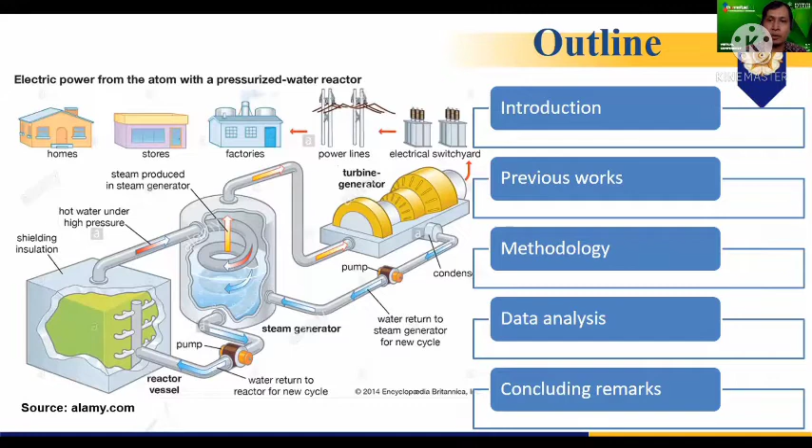So as an introduction, let us consider an accidental scenario in the primary circuit of a pressurized water reactor or PWR, namely loss of coolant accident or LOCA. As a result of a small break in the reactor primary circuit, there will be a sudden pressure drop causing a phase change and resulting in a countercurrent flow along the hot leg, a part in the primary circuit which contains a horizontal part, an elbow, and also an inclined part, namely the riser.

Once the steam flow rate increases, a limit of the countercurrent flow might be reached. It is called countercurrent flow limitation or CCFL. The CCFL initiates a flooding regime in which the partial or total fluid flows co-currently with the gas along the hot leg. This phenomenon, of course, is a disadvantage for the emergency cooling process.

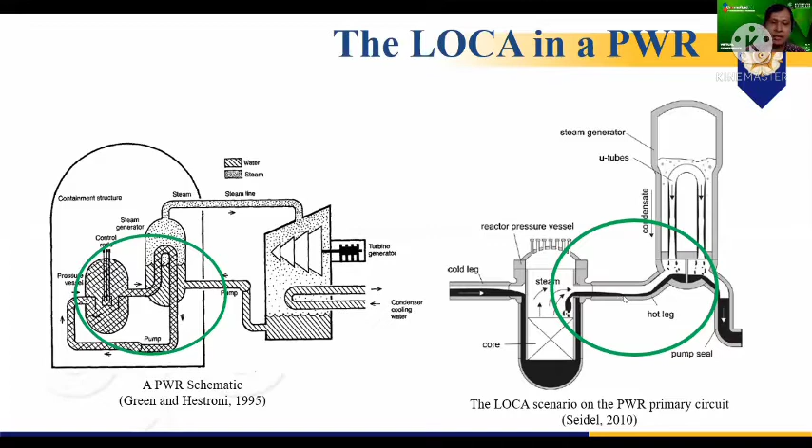Furthermore, it is very common to assess the pressure drop characteristics during CCFL research. The fluctuation of this particular parameter may indicate inception of the flow regime transition from a counter to a co-current flow. Hence, several statistical tools such as the probability density function and also the power spectral density give the opportunity to investigate the characteristics of time series pressure fluctuations.

So the research questions may be what the differential pressure fluctuations during the flooding regime are like, and based on those statistical tools, do the fluctuations deliver certain meanings?

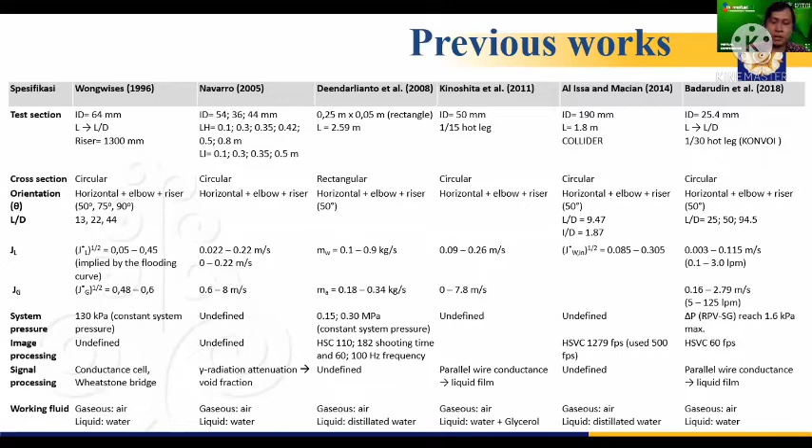This section describes several previous works on countercurrent flow limitation in hot leg geometry. It contains the working parameters investigated and the corresponding results obtained. And we consider several of these parameters in the present work also.

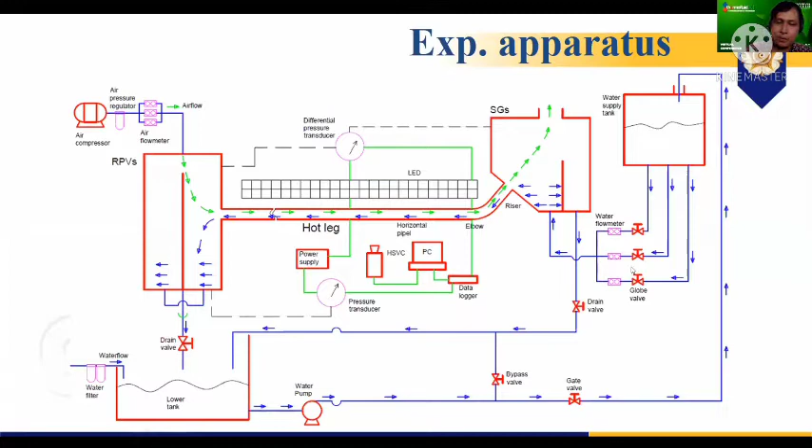Water from the bottom container was pumped into the upper container, and as a result of the gravitational force, the water later flowed along these parallel channels. To manage the water flow rate, several water flow meters were installed and controlled by several valves. Then the water filled the SG simulator, flowed along the hot leg, and went to the RPV simulator.

Meanwhile, air from a compressor at a constant pressure controlled by a pressure regulator went through the airflow meter, entered the RPV simulator, flowed along the hot leg countercurrently with the water, entered the SG simulator, and was released to the atmosphere.

The measurement systems used in the data acquisition consist of a differential pressure transducer to obtain the time series differential pressure voltage signal fluctuations between the SG simulator and the RPV simulator. To obtain information regarding the water level in the RPV simulator, we also used visual observation through a measuring line, validated by a static pressure transducer. Both pressure transducers were connected to a 12-volt power supply and a data logger interconnected to an analog-digital converter, a signal amplifier, and a personal computer.

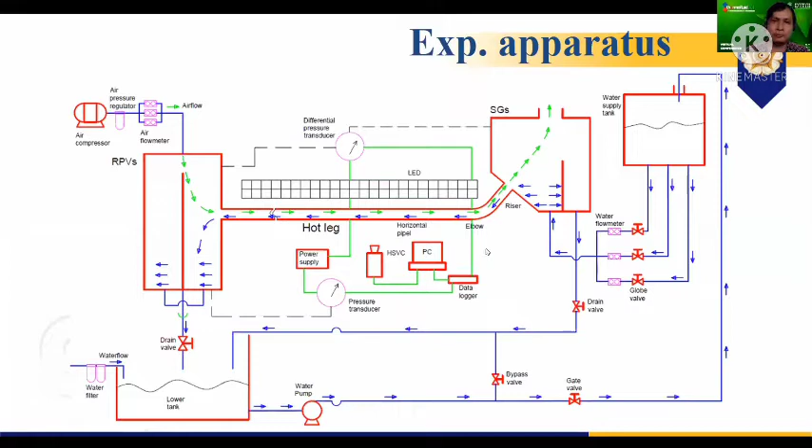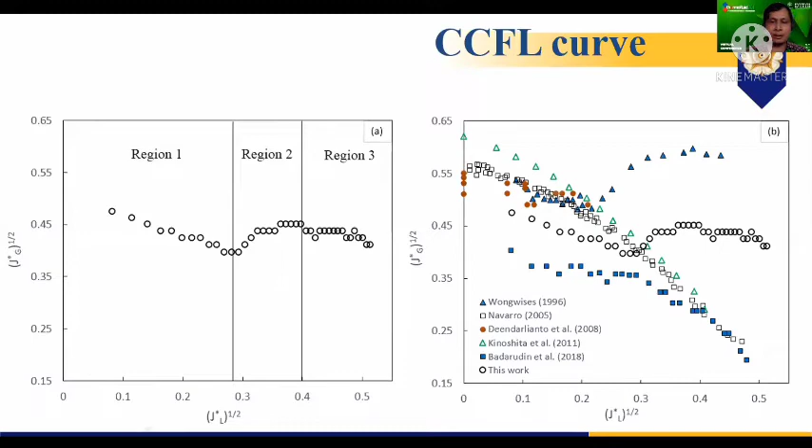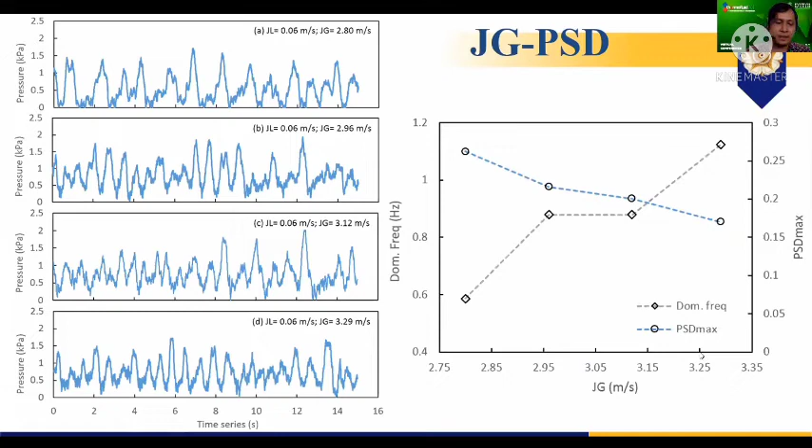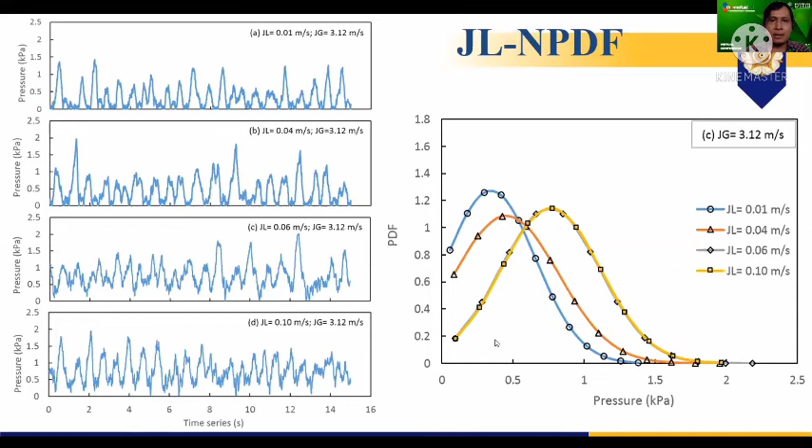However, for several other liquid superficial velocities, the results look different. The trend still saw an increase in dominant frequencies with the increase of the gas superficial velocity. The maximum spectrum tends to decrease with the increase of the gas superficial velocity. So this is the other comparison that we make; we want to see the effect of the liquid superficial velocity. Overall, the trend is a little bit different.

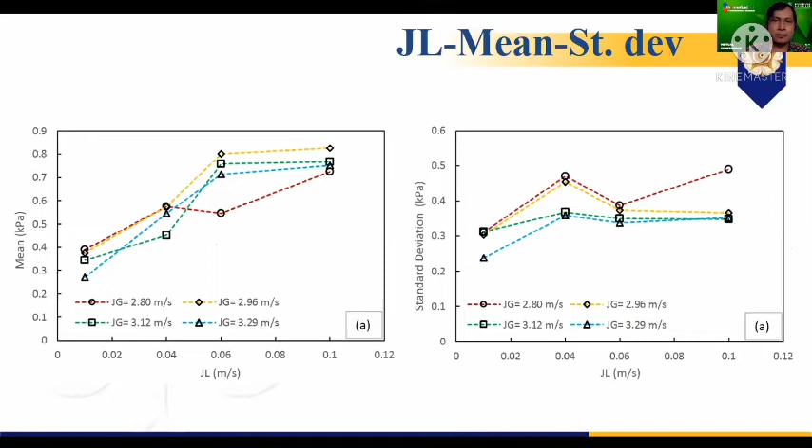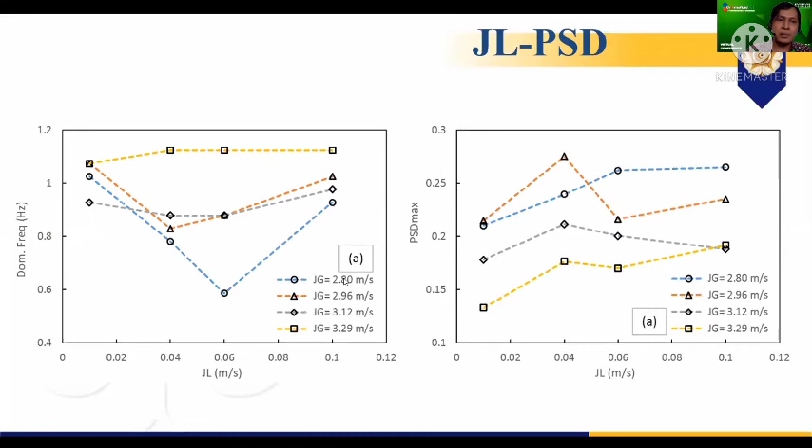And furthermore, for several other gas superficial velocities, the results look a little bit different. The trend still shows fluctuation trends for both the dominant frequencies and the maximum spectrum with the increase of liquid superficial velocity. The gas superficial velocity is taken from the regions that we divided before.

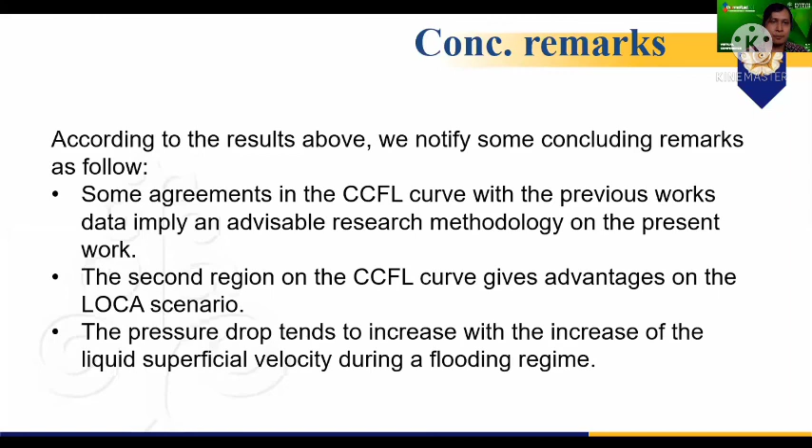So according to the results we obtained above, we note some concluding remarks as follows. Firstly, some agreements in the CCFL curves with the previous works' data imply an advisable research methodology in the present work. Secondly, the second region on the CCFL curve gives an advantage in the LOCA scenario. And third, the pressure drop tends to increase with the increase of the liquid superficial velocity during a flooding regime. So thank you for your attention.